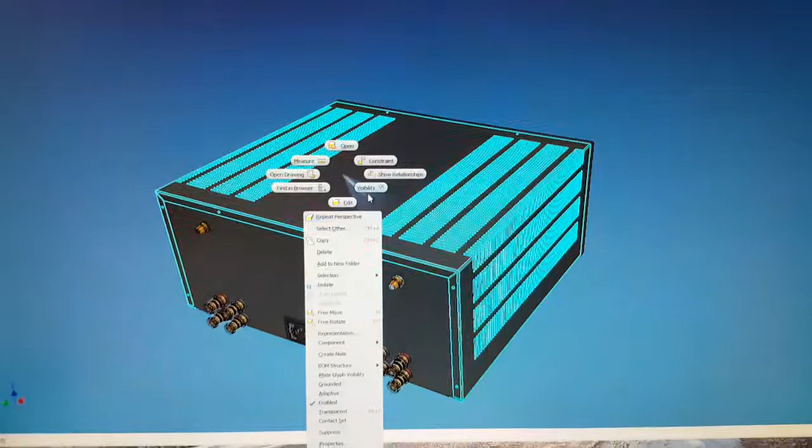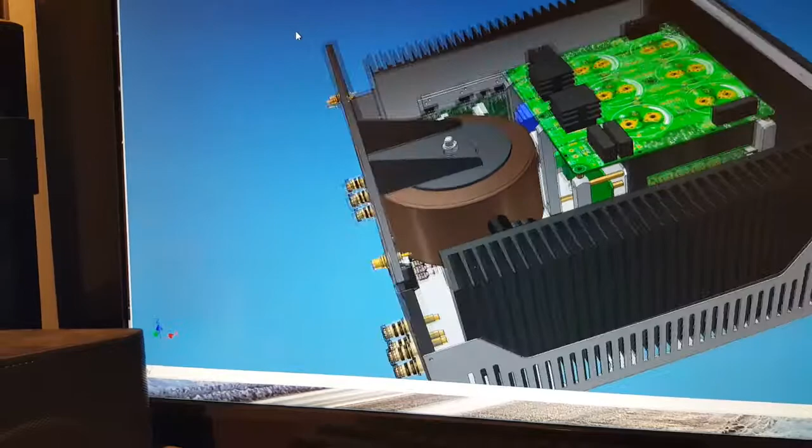Now, what I did to get the power supply switch at the bottom, which was, I thought, fairly good, was I lifted up the transformer and put the switch underneath the power supply, like this, so I could run the wires through the actual power supply. So if we could just come around to the front of it here, down through here,

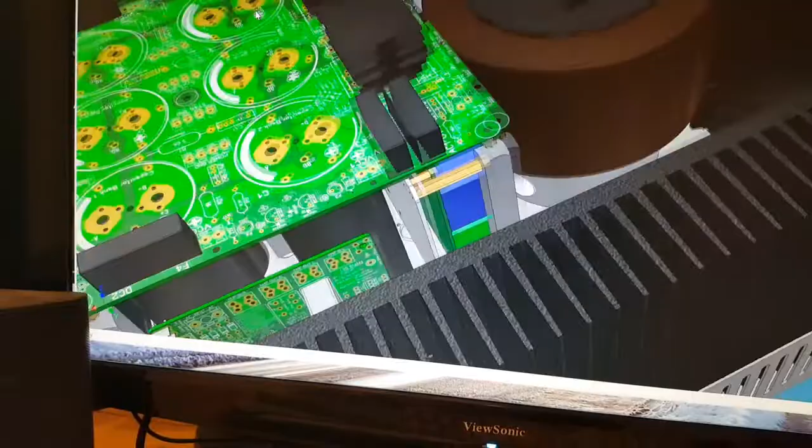whoops, a little bit hard to see, here we are. So you can see here, there's the block that it's sitting on, and the wires will actually come through underneath the toroidal transformer. So that way it's a lot neater. So when we come out of there, it'll just run underneath.

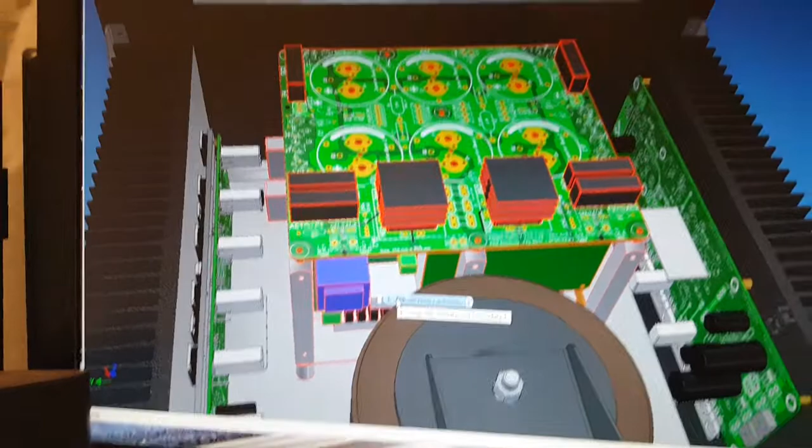Now, how I'd like to try and do this STO is on the left, this little box down the bottom here is that soft start circuit that you showed me off eBay, and I think it's a pretty good idea to put that at the base there. And in this first version, so that's it there, I think it's orientated like that.

What I want to do is just use this circuit to feed the 240 into this soft start circuit to begin with, and then later on I'll work out the resistive network to replace this board with a soft start actual function. Because this is somebody else's work, I want to try and work out this sort of thing for myself. But initially, just to get the amp running, I'm going to just do that.

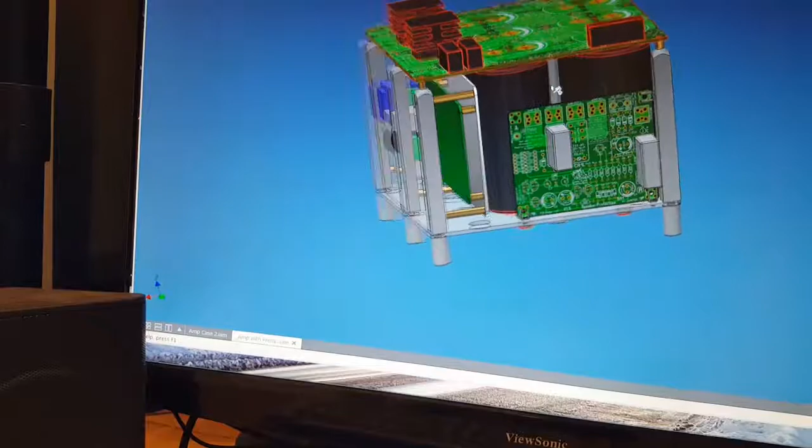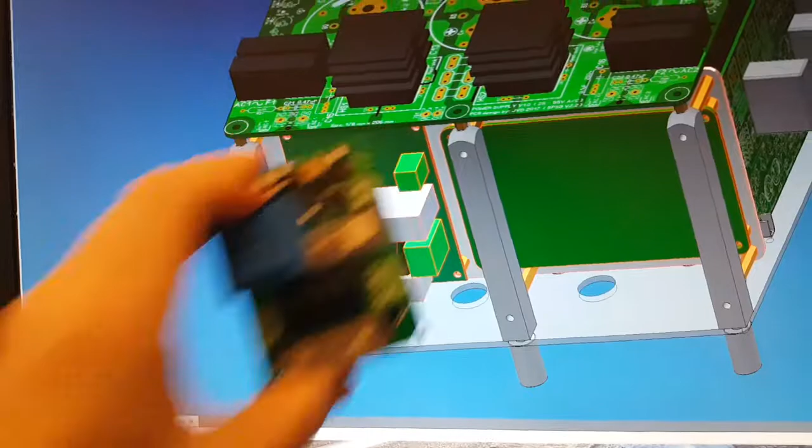So if we just open up this assembly just here to start with, you'll see this is the board here. So our power supply on the top, speaker protection on one side here, other speaker protection on that side. In the middle here is where the eBay soft start is going to be, and then this is the board on this side where I want to design the new STO board.

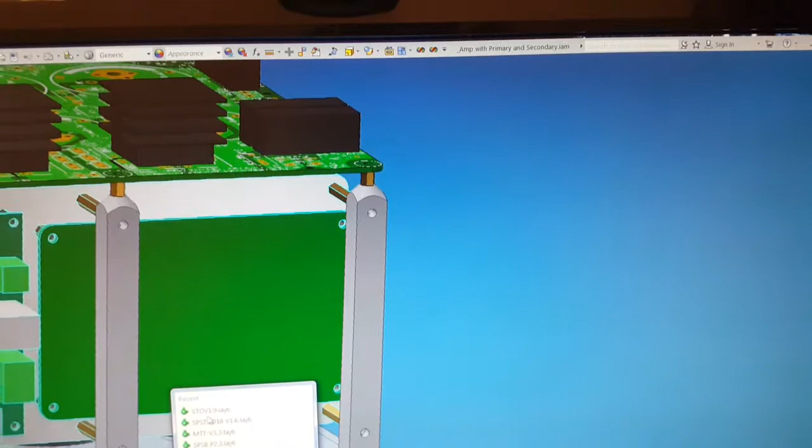Now, it doesn't need to be this full width, but that's the amount of room that we've got to work with. So in the actual file here that I'm going to start looking at, you can see that this is the maximum height here that I've got to work with. This is where the transformer has to go. It can't go this side of this line, and it can't go this side of this line.

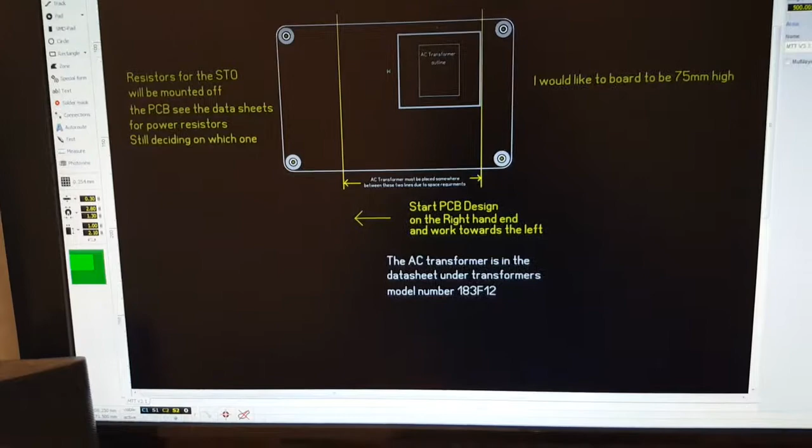It's got to go somewhere in this area, because otherwise it will hit these bars. So that's what those lines are for. As you can see with the other one, luckily enough, it clears that bar there. So the transformer is clearing that bar.

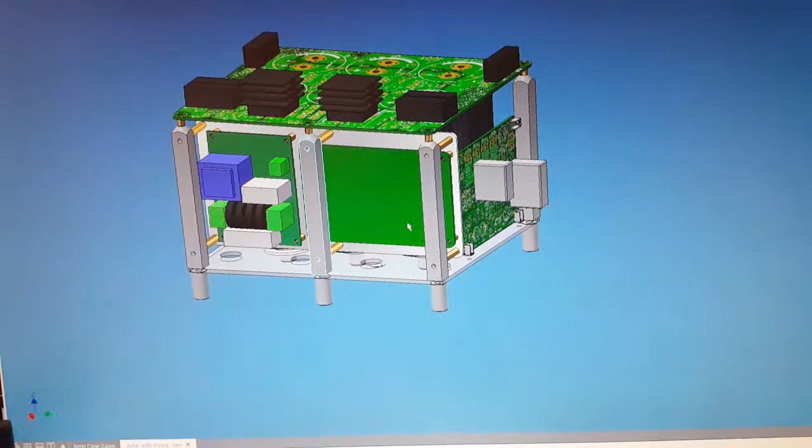So what I'm thinking is that on this side, I'm going to need to have the input here for the button and all that sort of stuff, and then down here at the bottom, or preferably at the top here, the circuit. Now, probably the bottom is the best spot for the transformer. So while we're here, I might just actually move that. The transformer is probably going to be best at the bottom, obviously, because the wires are coming up from the bottom there.

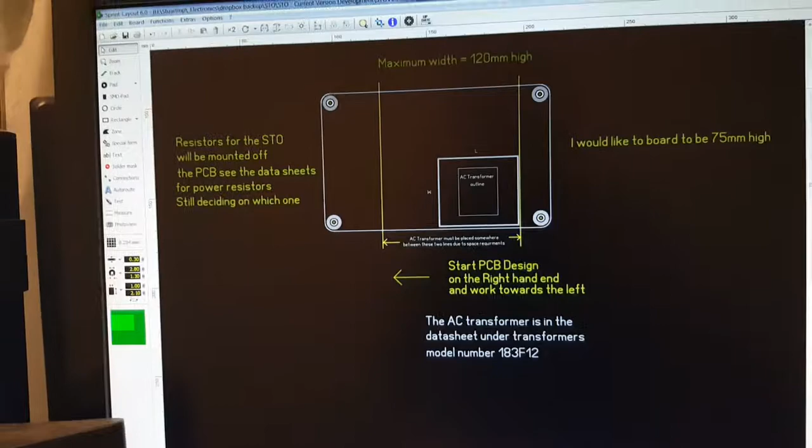So just save that. That's in the Dropbox shared folder that I sent to you yesterday. So let's go back to here. So you can see here the wires, I've got some holes in this base plate here, so the wires can come up and through there from the 240.

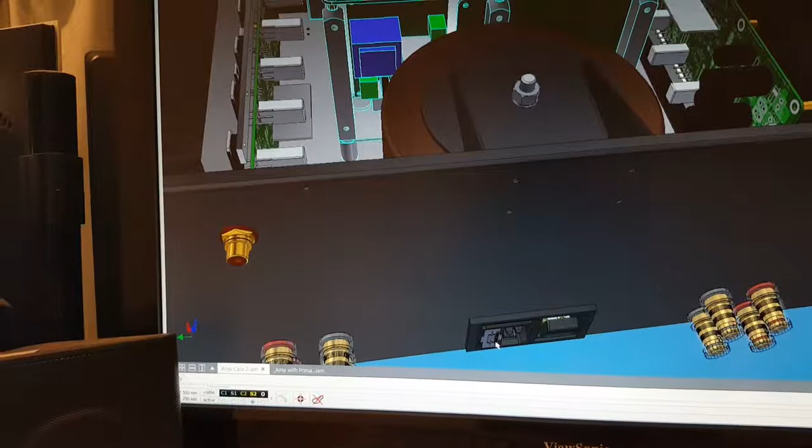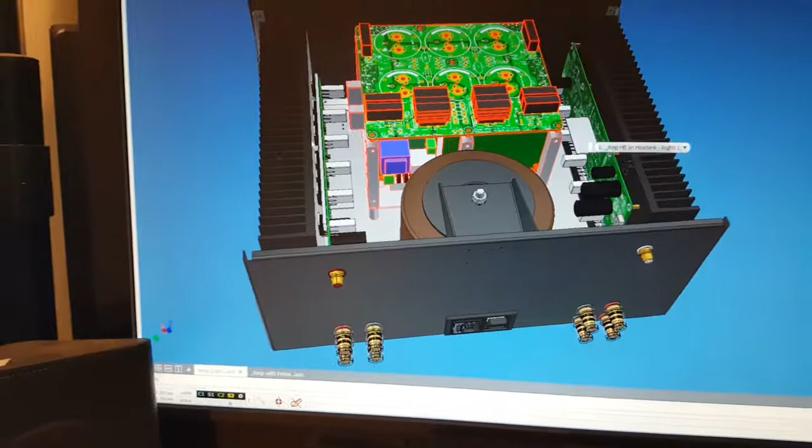So the input power supply will come into the soft start circuit, out of the soft start circuit, back into the toroidal transformer, and then out of the toroidal transformer into the secondary power supply board, and then obviously into your amplifier boards. So as you can see, my switch is on this side here, and the little standby LED

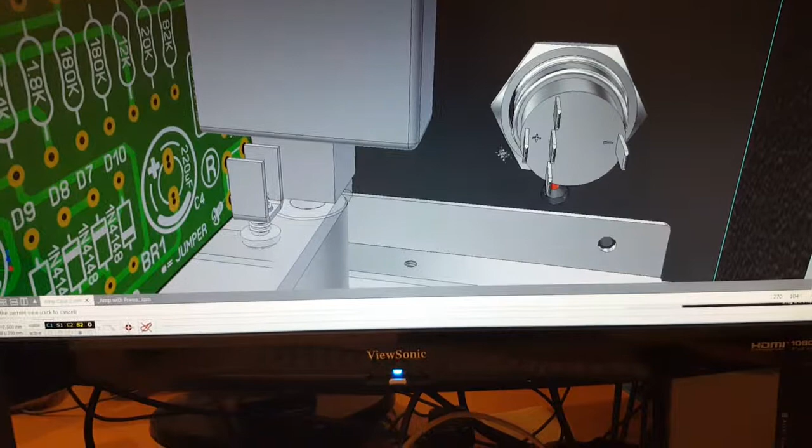is also down there. So there's a hole for the standby LED just down there below the switch. You can just see it there. Let me just recenter my view. So the idea there is it's a 5mm hole with a 2mm hole. So you push the LED in. I'll just glue it in with some hot glue gun, and then that'll just be my standby LED.

So you can see here, just come around the other side, that'll be the blue button, and then the standby LED will just be underneath there, just shining out through that hole, just to keep it as clean as possible, just a small amount of red light. And yeah, so that's what I'm trying to achieve.

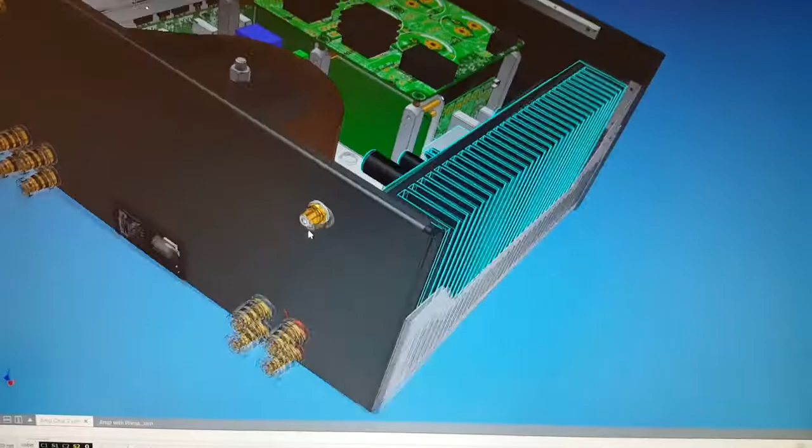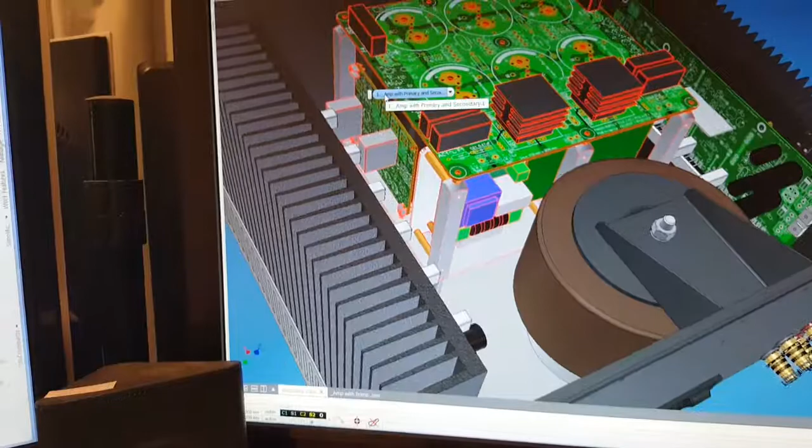Need to make some connections on this side here, obviously for the switch, and then the other wires that are running to the speaker protection boards, one on this side and one on the other. I haven't really counted how many pins there'll be, but they'll have a connection between both sides of the board. So that's roughly what I'm trying to achieve.

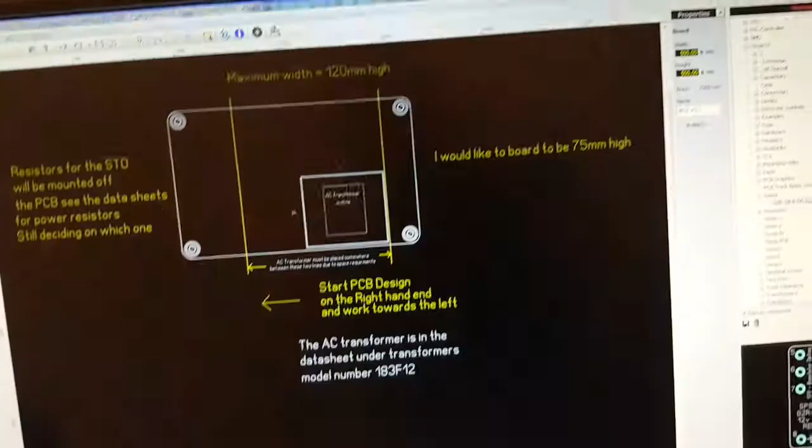It'd be great if you could help out with the Multisim file, work on that for a little while with me, and we'll get that right, and then maybe we can try and get this board turned out. We may not need to use all of this space. This might be a lot shorter, but I'm not too sure at the moment. I've got it down for 120mm as being the maximum width, and hopefully that'll be enough.